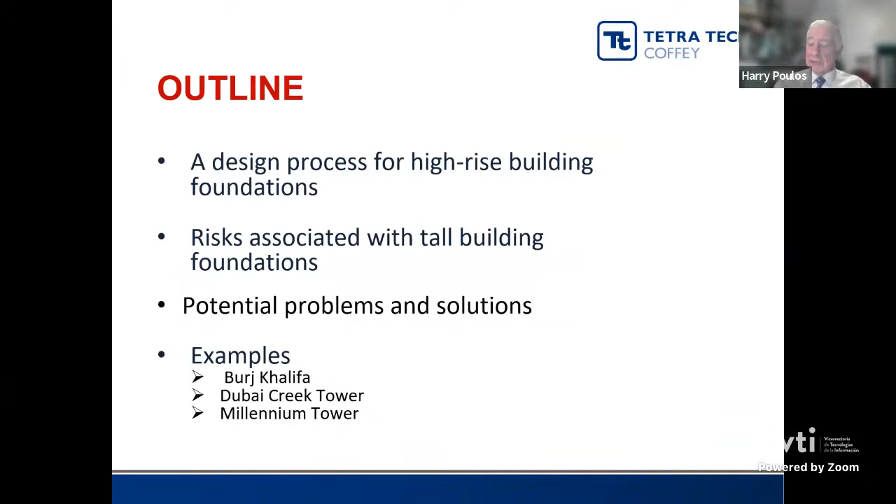And then I'll talk fairly briefly about 3 examples: the Burj Khalifa, the Dubai Creek Tower, both of these in Dubai, and then the Millennium Tower in San Francisco.

Now, the number of tall buildings - this graph is from the Council on Tall Buildings and Urban Habitat. What it shows on the vertical axis is the number of tall buildings that have been completed, and on the horizontal axis are the years. You'll see there's been an almost consistent increase in the number of tall buildings. These are buildings, I guess, in excess of 300 meters, so these would be super tall buildings.

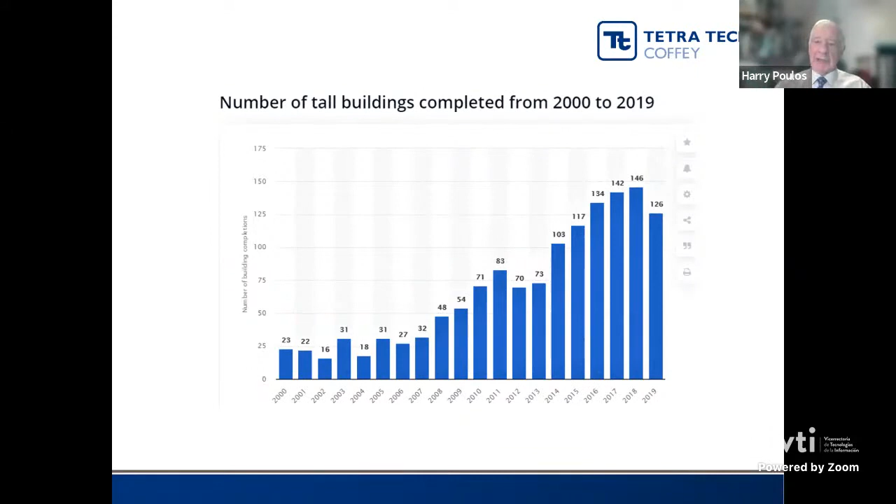There was a slight dip in 2019, but I think the number of tall buildings continues to increase significantly. Some aspects related to tall buildings are that we have high vertical loads, and they tend to increase non-linearly with height, because the taller the building, the more robust and heavy it has to be. We normally also have low-rise podium areas adjacent to the tall tower, so we have the potential for differential settlement between the tower and the low-rise area.

We have high lateral forces and moments, and those forces and moments are cyclic in nature. We also have to design for seismic forces due to earthquakes, which give rise to two types of forces: inertial forces, caused by the building moving backwards and forwards, and kinematic forces, induced in the foundation system because the ground is moving backwards and forwards and impacting on the foundation system. We also have to make sure we design for human comfort, so we design the dynamic response of the structure-foundation system so that you don't have excessive movement and vibration.

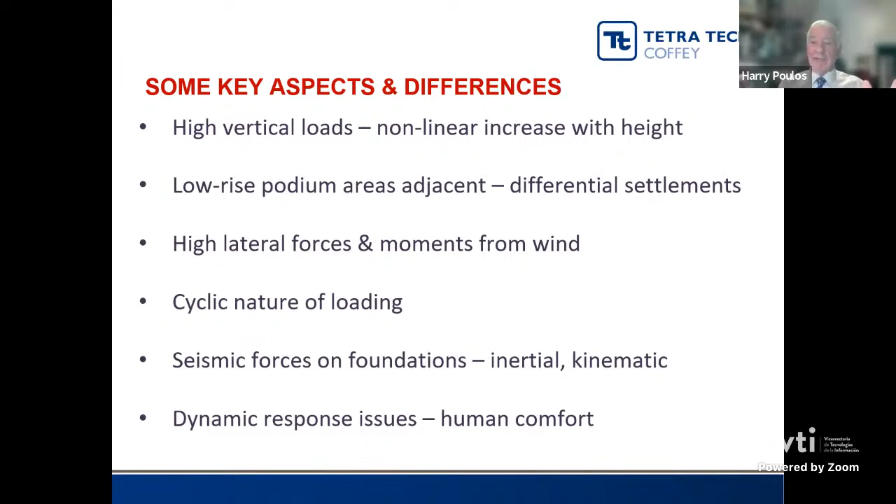Here are some interesting aspects that make tall buildings different. In recent times, there's been a tendency for taller towers to be located on smaller footprints, and we now have a number of buildings where the aspect ratio - the ratio of height to width - is in excess of 20, whereas normally it would be 8 to 10. This has given rise to big issues with respect to lateral and overturning stability of the foundation system.

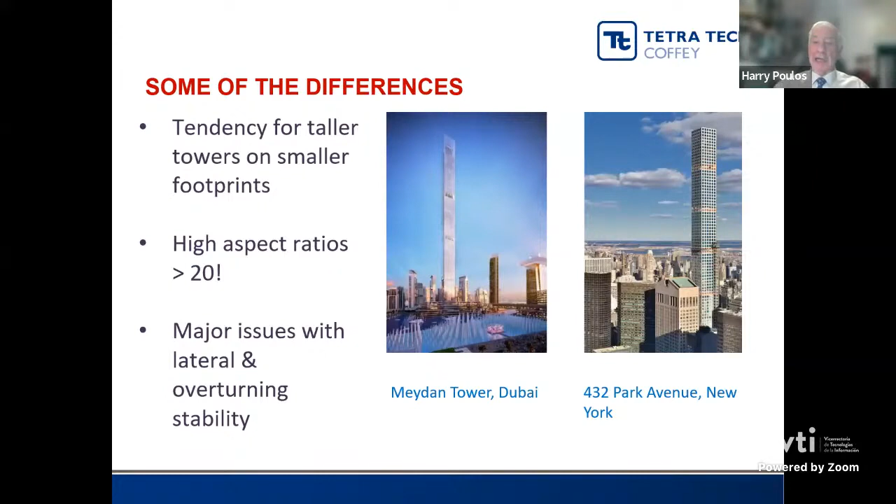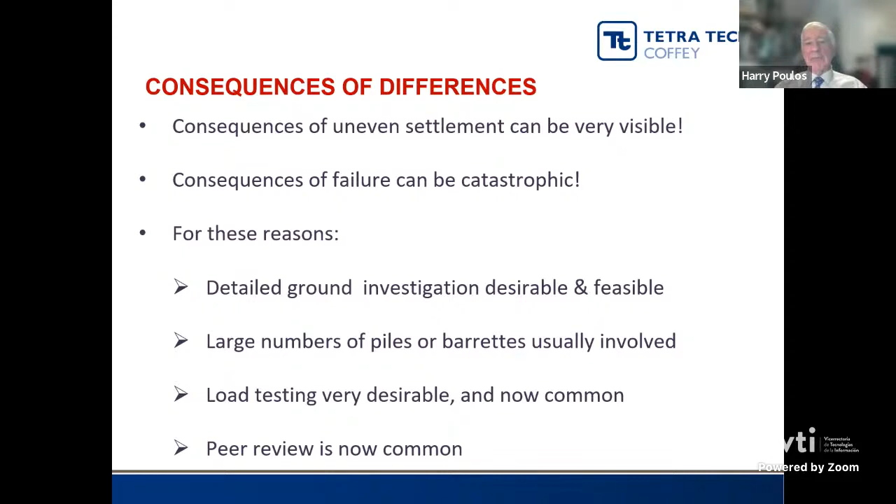So the consequences of these differences between tall buildings and other foundations are that even uneven settlements can be very visible, and the consequences of failure can be catastrophic. For these reasons and others, we need detailed ground investigations. Usually there are a large number of piles or barrettes involved. Load testing really needs to be done, and fortunately is now becoming quite common with major projects, and peer review is now much more common than it used to be.

Some of the ingredients for economic foundations are: firstly, we have to have the right concept for the structure and ground conditions. We have to have the right design criteria and methods of design, appropriate ground data and design parameters, quality construction, and appropriate pile or foundation element testing. Ideally, we also need to monitor the performance of the building during and after construction so we can satisfy ourselves that what has been constructed is in accordance with our design intent.

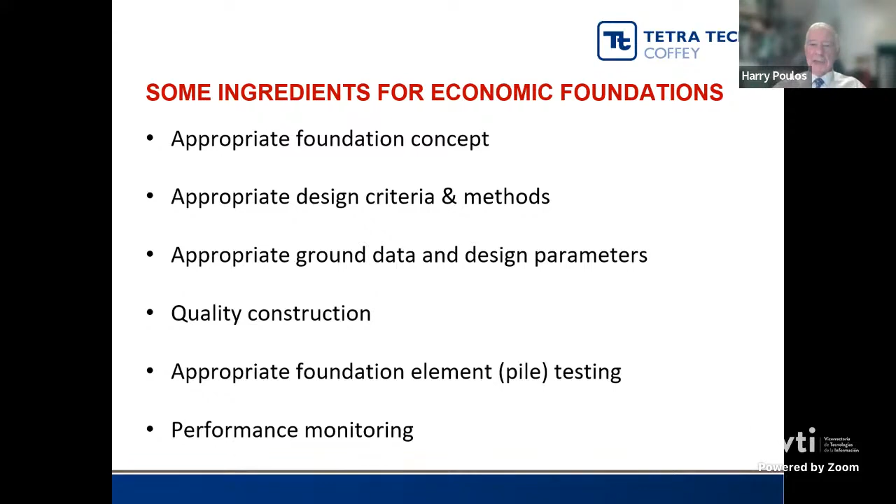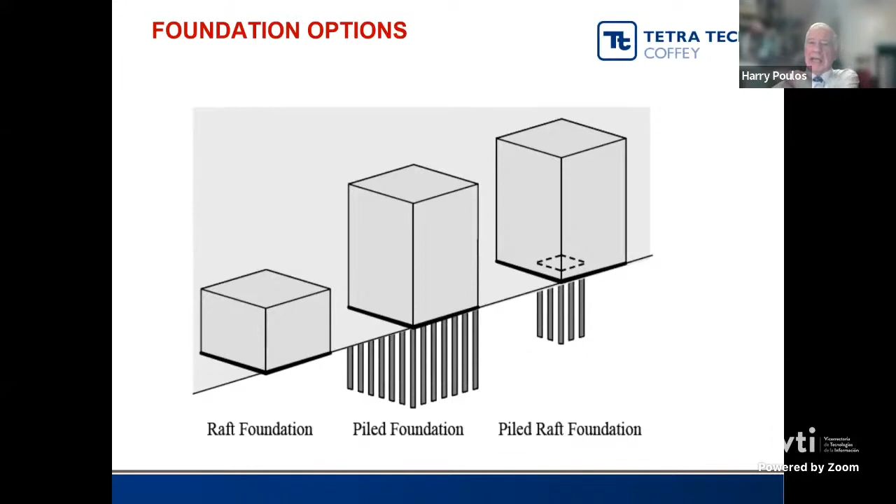Very quickly and simply, we normally have three types of foundations used for tall buildings: the raft or mat foundation, suitable for buildings on good quality rock and perhaps not too tall. Most tall buildings are on some form of pile foundation, either fully piled, where the piles take all the load, or, in more recent decades, the piled raft foundation, where it's recognized that the raft or basement slab can provide stiffness and resistance to the foundation system. This can enable us to reduce the number of piles and assist in the sustainability of the foundation system.

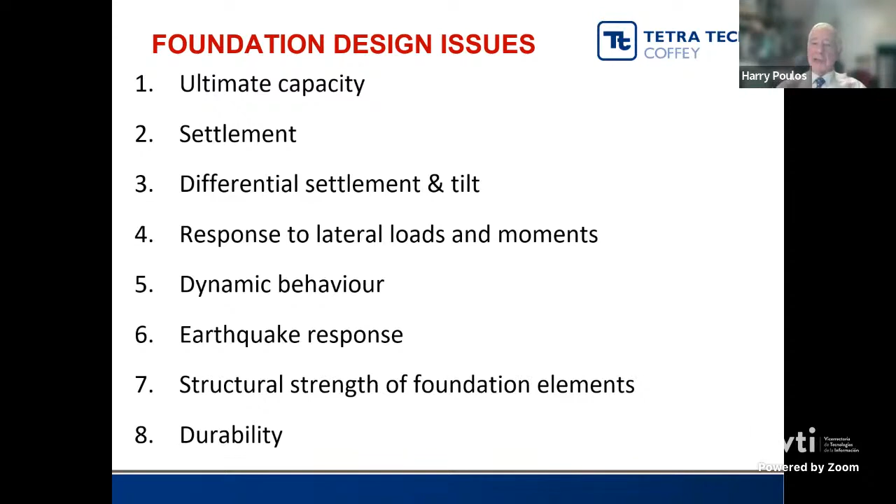So the foundation design criteria, the things we have to check for: ultimate capacity of the foundation system, the settlement and differential settlement and tilt of the building, the response to lateral loads and moments, the dynamic behavior and earthquake response. These are geotechnical issues, but we must also be aware that the foundation system has to be designed for adequate structural strength and durability. These days, it's not uncommon for specifications to require the foundation system to be durable for at least 100 years.

In the design process we adopt, we have three stages that we normally consider. The preliminary stage, the earliest stage, where we develop the foundation concept and decide the optimum type of foundation - whether a piled raft or a pile. Then we go into a detailed stage where we develop and optimize the design, and importantly, we interact closely with structural engineers. Then in the final stage, we do the final design, hopefully with the aid of load test data, so we can optimize and finalize our designs.

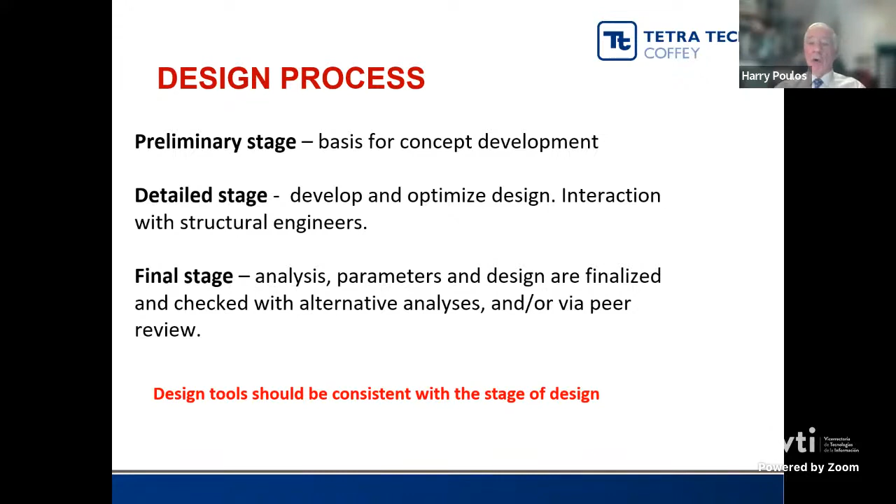We also incorporate peer review considerations into that final stage. Design tools should be consistent with the stage of design. It's not sensible in the preliminary stage to start using three-dimensional finite elements, because normally we don't have enough detail of the final foundation concept, nor all the geotechnical data required for detailed analysis. That normally comes in the final stage.

The analyses we do include ultimate limit state analyses, where we examine overall stability and geotechnical capacity. We also normally allow for cyclic loading analyses, because if there is a large amount of cyclic loading, there is potential for reduction of skin friction of the piles. We try to design the piles so that cyclic loading is no more than about 50% of the shaft friction capacity.

In terms of serviceability or allowable movements and settlements, typically we specify no more than 100 millimeters, although some buildings in Frankfurt, Germany have settled 150 millimeters or so without any damage. We try to limit the differential settlement or angular rotation to 1 in 500.

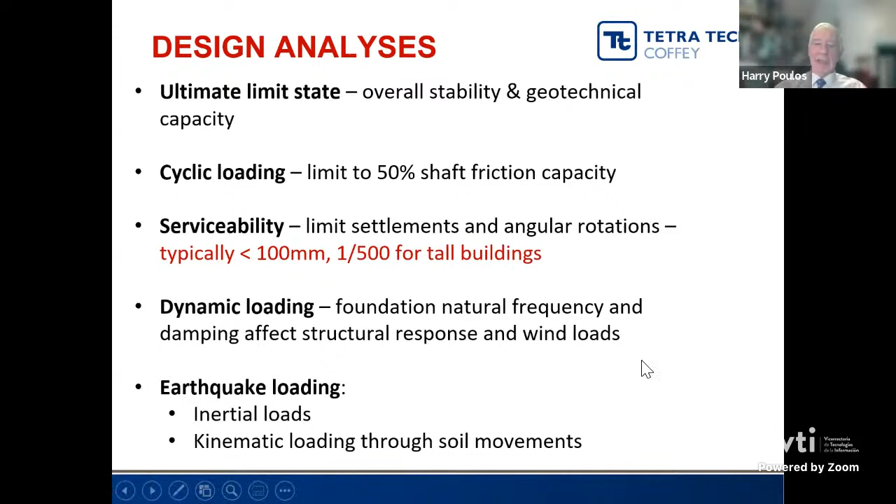We have dynamic loading where there are requirements for human comfort, so you have vibration and frequency requirements. As I mentioned before, with earthquake loading we need to take account of both the inertial loads due to the structure and kinematic loads through soil movements.

The main geotechnical parameters we need to assess in foundation design are the ultimate shaft friction and end bearing. If we've got a piled raft, we also need to know the ultimate bearing capacity of the raft.

We need to estimate the soil stiffness or modulus for vertical loading, bearing in mind that for long-term dead and live loading, the modulus is generally smaller than for short-term loading such as wind or seismic loading. It's important to distinguish between those two when looking at long-term settlements versus short-term movements due to wind loading. We need to estimate the ultimate lateral pressure so we can design the piles for lateral loading, and we also need soil stiffness or modulus values for lateral loading, since they will generally differ from those for vertical loading.

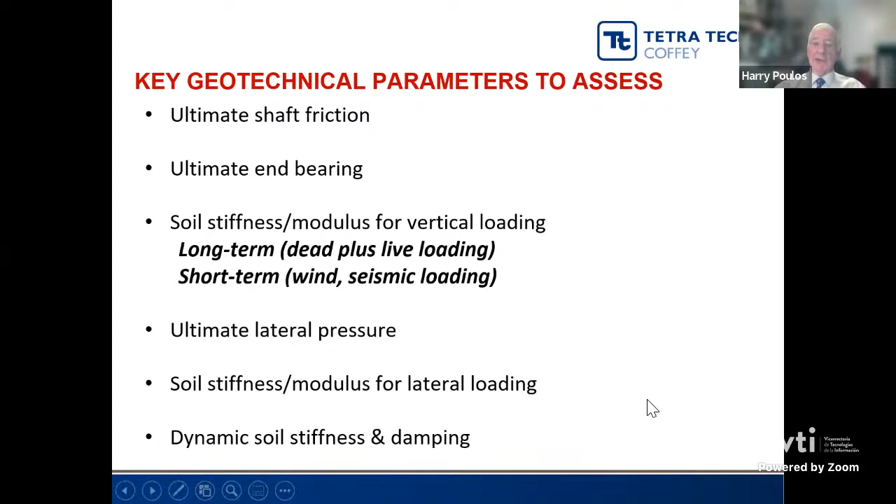We also need to estimate dynamic soil stiffness and damping of the soil in which the foundation is located. There are a number of soil structure interaction issues.

When we do stability calculations, we need to check first that the geotechnical resistance is adequate. We factor down our estimated geotechnical capacity so that the factored down geotechnical capacity exceeds or equals the factored up loadings. But we don't factor down geotechnical resistances when checking for structural loads in the foundation system, because that would artificially limit the amount of load that the piles can take.

We need to be aware that the stiffness of the superstructure will affect settlement and differential settlement. This is best taken into account in the structural analysis using values of the stiffness of the piles and the raft, which we provide to the structural engineer.

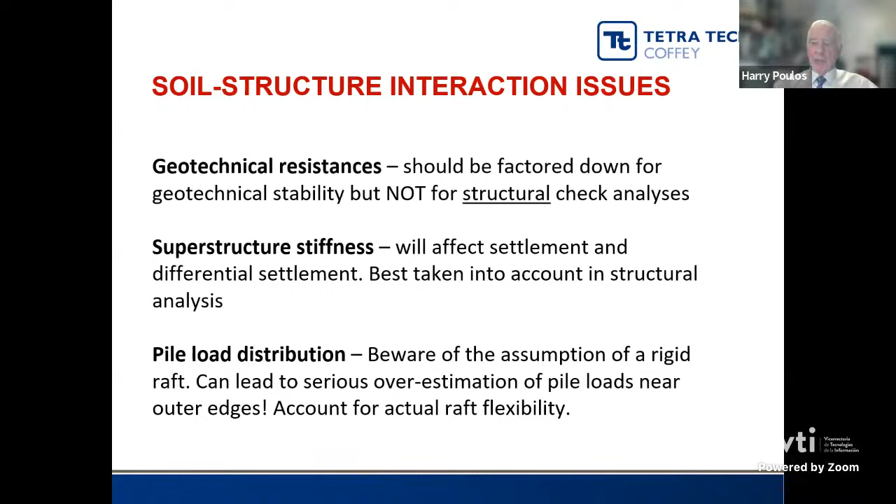Some commercially available software assumes you have a rigid raft. That isn't always a good assumption for tall buildings, particularly those 50 or 60 meters in extent, because even fairly thick rafts, as I'll show you later, can be relatively flexible over those sorts of distances.

It's important that we have cooperation between structural and geotechnical designers. That is essential for a successful outcome.

One of the key geotechnical outputs we provide to the structural engineer is values of pile stiffness, the axial, lateral, and rotational stiffness for each pile within the group. These stiffness values must take into account the interaction between piles in the group, which affects the stiffness as compared with a single isolated pile. Those values are then incorporated into the structural analysis to obtain structural design actions or loads.

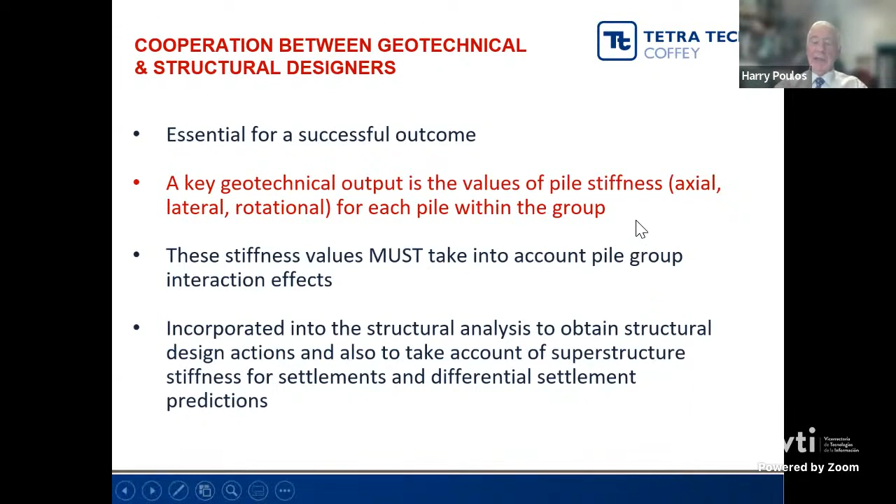And that takes into account the effects of superstructure stiffness and allows us to get a more accurate assessment of settlements and differential settlements. So that's the design process.

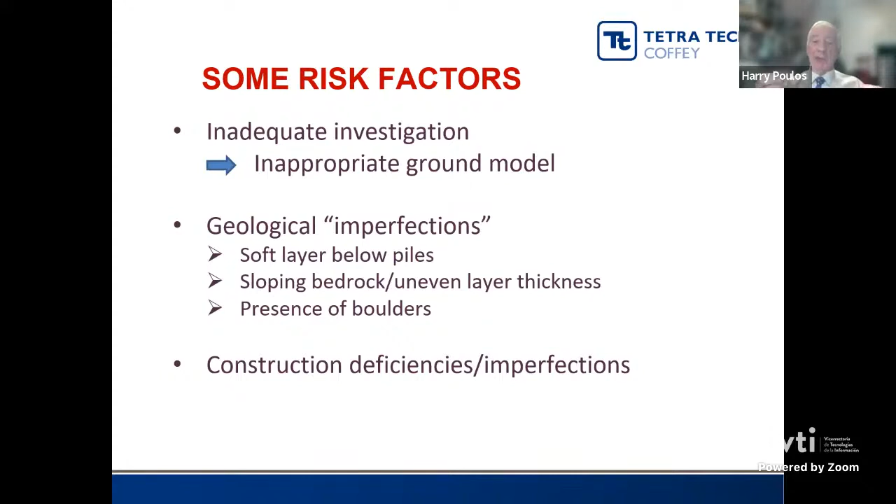Now, in reality, we have a number of risk factors in foundation design. It's possible, and has unfortunately been the case in many past projects, that we do inadequate investigation, and so we finish up with an inappropriate ground model. We also may have to contend with the reality that geology provides imperfections—non-ideal conditions. For example, we may have a softer layer below the tips of the piles, sloping bedrock or uneven thickness of layers, or boulders. And in terms of the construction process itself, there may be problems or deficiencies.

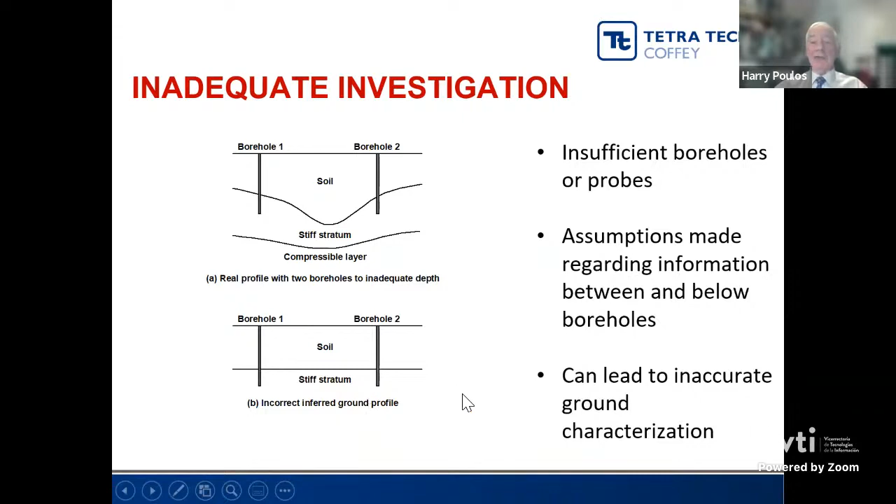Just briefly to illustrate some of these risk factors, here's a hypothetical situation where we put down two boreholes and we think they show a horizontal soil layer with a stiff stratum underneath. But what we miss here are two important factors. One is that there may have been an old riverbed in between, and if our boreholes don't go deep enough, we miss the fact that there is a compressible stratum below that stiff stratum. That can lead to a simplified and incorrect ground profile, which can in turn lead to problems with our foundation, which we'll talk about towards the end of the lecture.

And here are some of the geological imperfections. This first one shows a case where there are compressible clay seams in the rock into which the piles are founded. This diagram, top right, shows strata of varying thickness or sloping bedrock.

What happens there is that because the piles are of unequal length, there is a tendency for the foundation to rotate a little. The next one, bottom left, shows a situation where you have a compressible stratum under the founding stratum, and that may not be detected when you do pile load tests, because with a single pile, that compressible stratum may not influence the results very much.

But for a wide pile group, that compressible stratum can be very influential. And finally, in this particular case, you may have boulders in the ground. This would be particularly where you've got glacial deposits, and you may install a pile which you think is on rock, but that may be just a boulder, so the pile itself is not really on rock, but on a boulder which acts like an enlarged base.

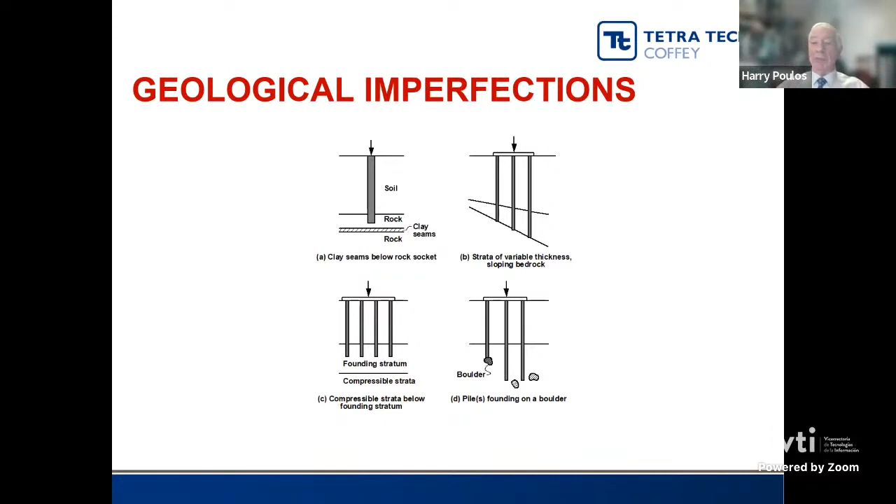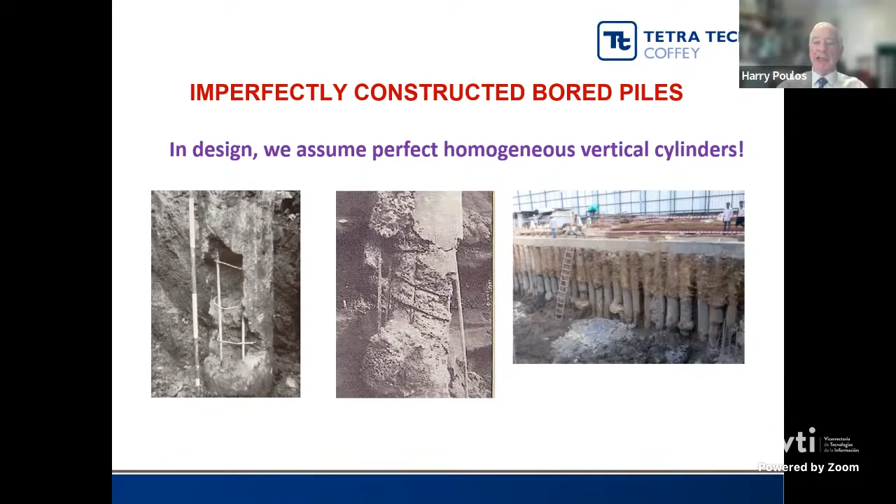And of course, we can have imperfect construction. Here are some unfortunate examples of bored piles, which are very imperfect, as you can see, and here are piles that are not very attractive because they're not what we assume in design—in design, we assume that the piles are perfect homogeneous vertical cylinders. In reality, that is certainly not the case here.

So what are the consequences of those imperfections? In terms of design issues, if we've got a situation with uneven settlements, we need to try to correct them to reduce differential settlements. We have two classes of methods, hard and soft, which I'll describe in a minute. We then need to design remedial or enhancement works so that we increase the resistance of the foundation system, and we need to be aware of the load sharing between old and new elements.

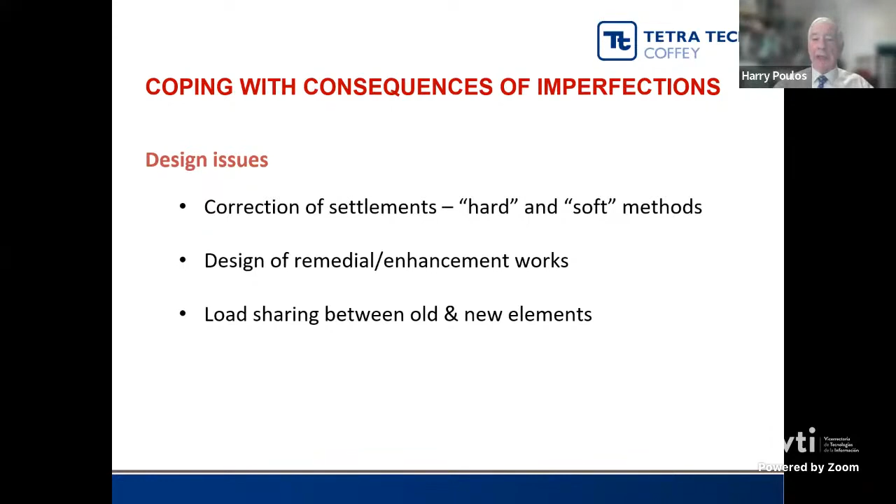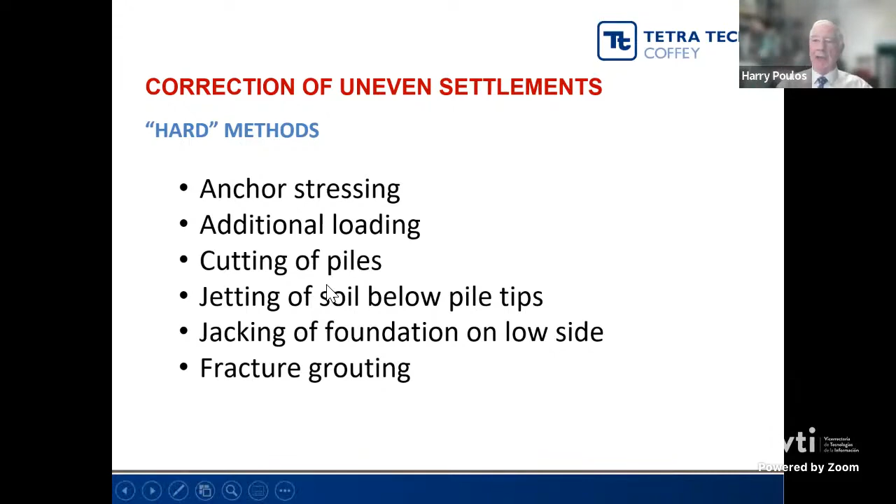Now, I mentioned methods of correcting uneven settlements. Here we have some of the hard methods—these actually put force on the foundation system or building to try to correct the uneven settlement. We can use anchor stressing or additional loading on the high side to try to get the high side to settle more. We can try cutting the piles, but that generally isn't very effective, and it's a bit of a terrible process. We can try jetting the soil below the pile tips, or jacking the foundation on the low side to jack it up, but that isn't always effective, because as you jack up, due to Newton's law, there's also a force that goes down, so that may not be effective. Another method used is fracture grouting to try to jack up the low side, but that is also not a very controlled process.

We have then what I call the soft methods, which basically involve doing something to the soil rather than to the structure. So we have the possibility of doing soil extraction—we remove some of the soil from the high side to try to induce extra settlement and so reduce the differential settlement.

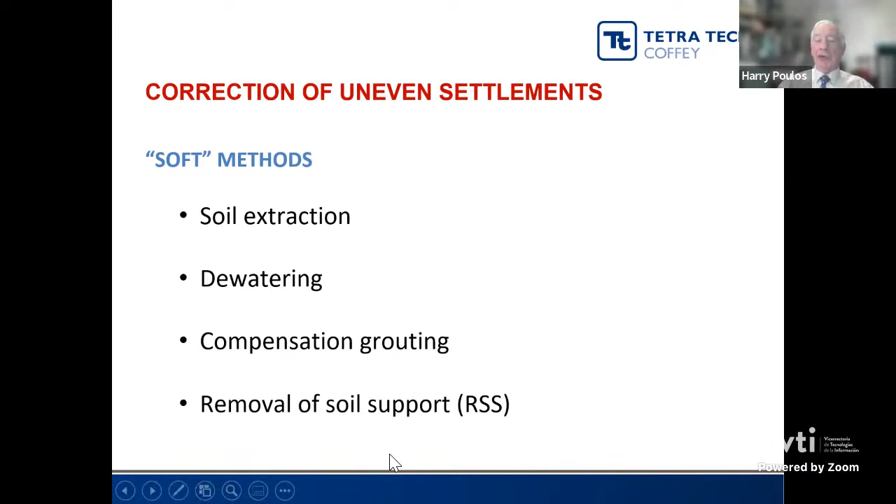We can, in principle, try dewatering, although that's not always a good idea. We can try compensation grouting so that we lift the soil on the low side, and we can then also try what I call removal of soil support.

These two diagrams show where soil extraction has been used, in at least two cases, and there have been many more. Here in Iran, there was a grain elevator terminal that had settled unevenly. So they constructed a trench and put in horizontal saws to remove soil from the high side increasingly, doing a series of saw cuts to induce the high side to settle more and reduce the uneven settlement.

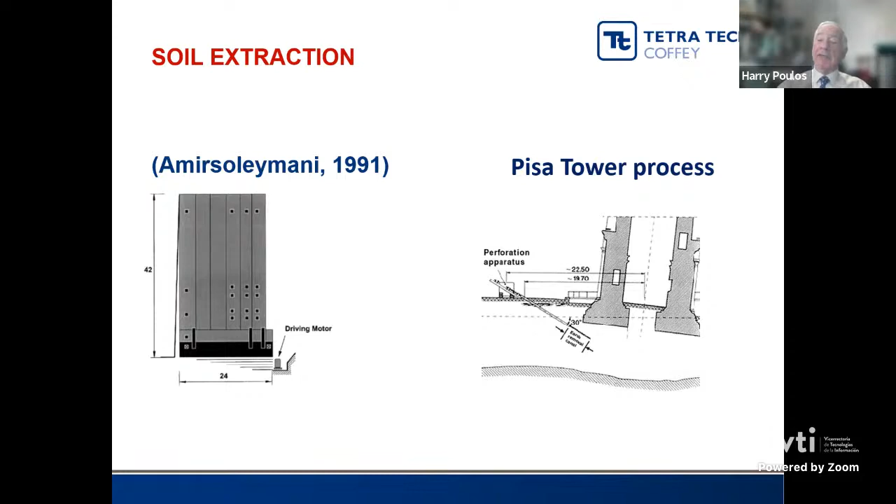And this one on the right, the very famous Pisa Tower process, where a series of inclined auger boreholes was introduced under the high side of the tower, and soil was augered out. I think there were 43 boreholes in all, and that corrected the lean of the tower by about 0.5 degree. Professor Burland, who was involved in that project, has estimated that it will increase the life of the building by some 300 years.

And I mentioned the removal of soil support approach. This is a method that has been used in China, and we almost used it in Hong Kong for a tall building. It involves drilling a series of boreholes outside the footprint to try to remove the soil support and cause some additional settlement on the high side of the building, to reduce the tilt.

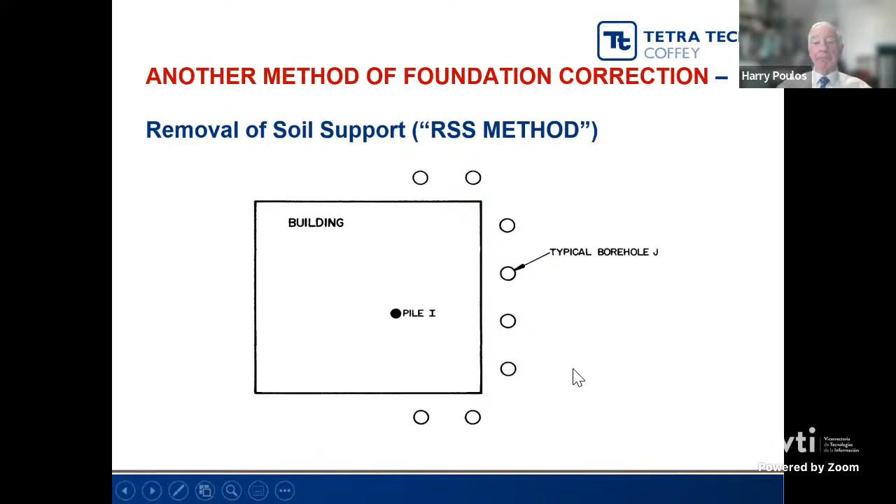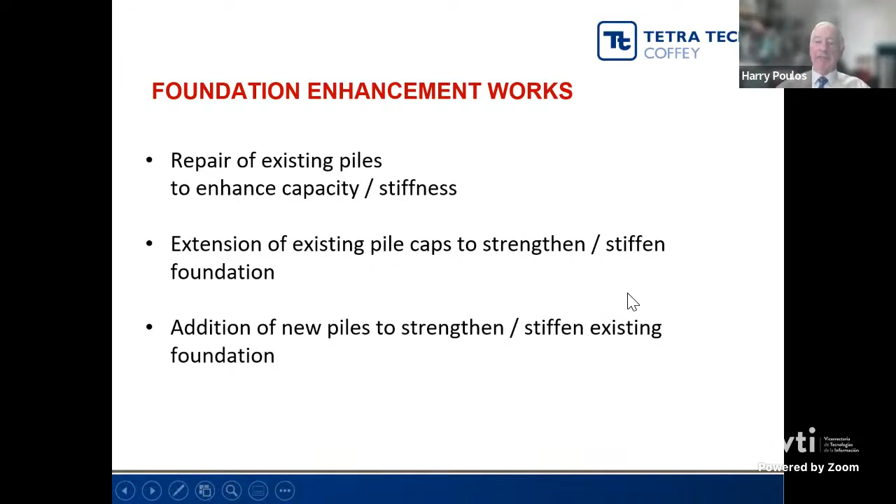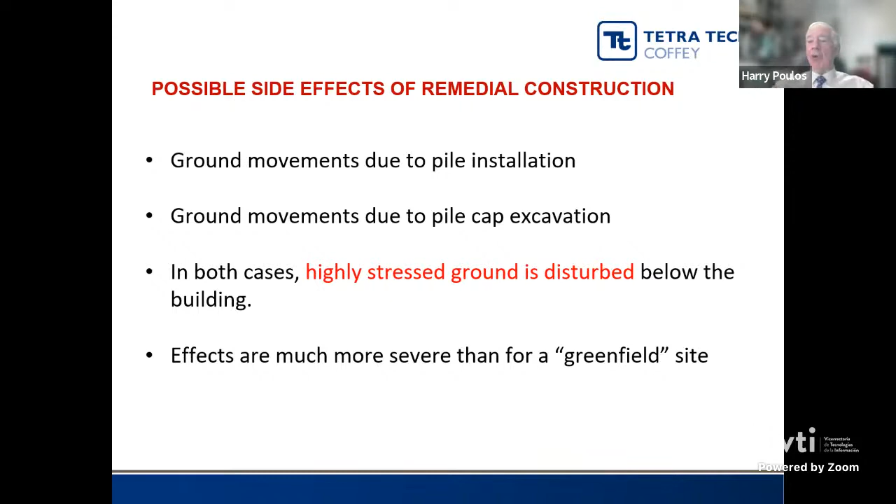We have to be very careful that when we do remedial work, we don't make the problem worse. Because when you're installing piles, you cause ground movements inevitably, and those can affect the existing foundation system. That will also happen if you do excavation for the pile cap itself. In both cases, you're disturbing the ground under the high-rise building, which is now highly stressed, so the ground movements due to your construction operations are much more severe than they would be on a green field, or level site, with no building.

What are the measures that we can take to reduce risks? Well, I think certainly the first thing we can do is have an independent peer review of the ground investigation report, and then an independent peer review of the foundation design.

Independent supervision of foundation construction, to try and avoid problems of construction imperfections. We need to be able to do foundation testing of the piles or barrettes. We need to monitor the settlements during construction and compare what we measure with what we predict, because if there is a problem, the sooner we can detect it, the sooner we can start to fix it.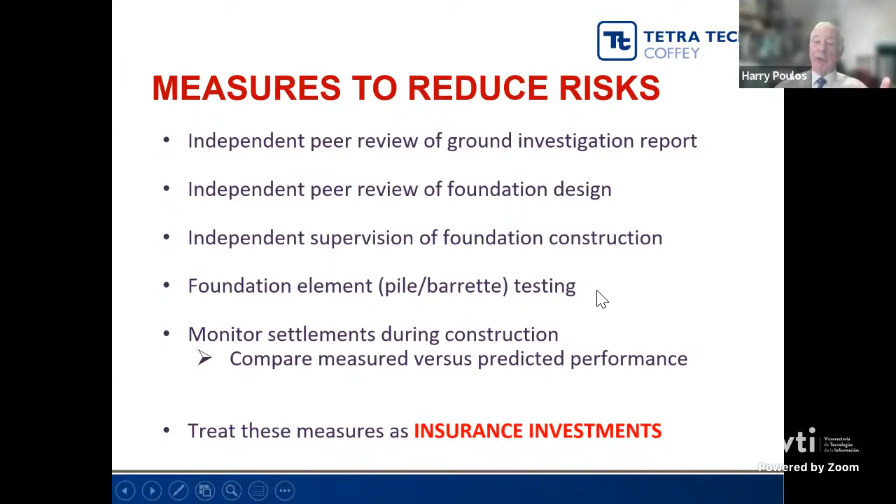We should treat these measures - they all involve money, of course - as investments in insurance rather than as costs. Because in the end, if you don't take these measures, the possible cost of fixing the problem can be very great.

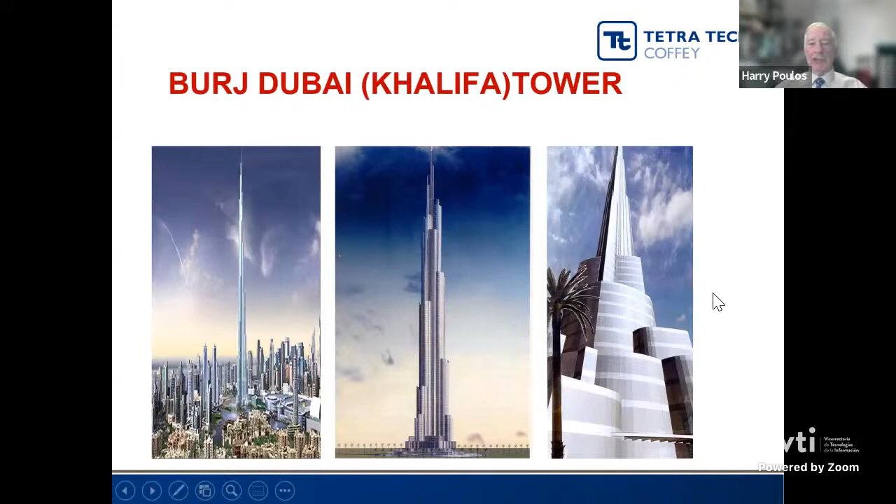So let me talk about the three case histories now that I have had some involvement with. The Burj Dubai, as it was originally called, or the Burj Khalifa in Dubai. These are the original architect's concepts, the drawings for them, and it was to be, and is still, the tallest building in the world. These are the challenges then, of the world's tallest building.

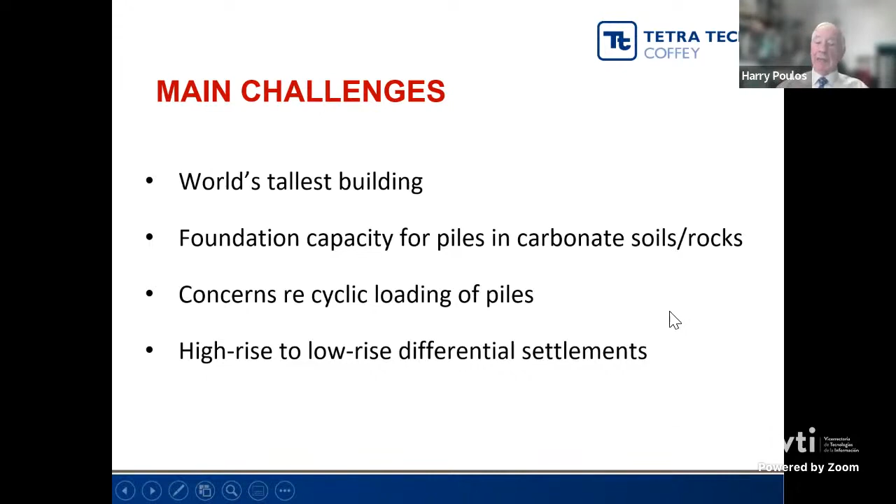The site characterization was fairly significant. There were 30 boreholes, and SPTs were done on the upper strata. Pressure meter tests were done in 5 boreholes, and a lot of piezometers were put in. Importantly, geophysics was done using cross-hole tomography.

The geophysics had two purposes. One was to give us profiles of shear wave velocity with depth so we could get other estimates of the stiffness of the ground. It was also a way of estimating and assessing the uniformity of ground conditions, because even with 30 boreholes there could be geological features we miss, and geophysics can identify those sorts of geological problems if they exist.

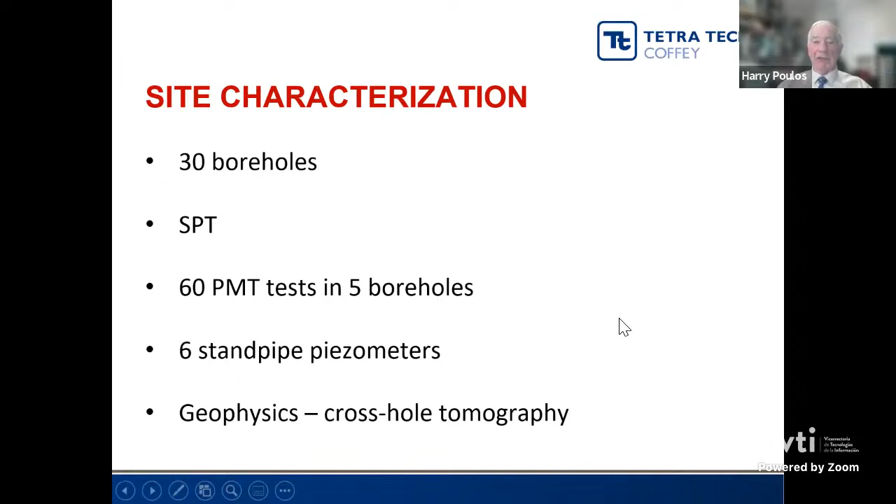Fortunately, in this particular case, the ground conditions were very uniform, and this is a simplified profile. We had some silty sand near the surface, and then a series of layers of cemented calcareous sands and rocks - essentially soft rocks with typical unconfined compressive strengths varying from maybe 1 to 3 megapascals. This shows the base of the tower, the raft, and the base of the piles.

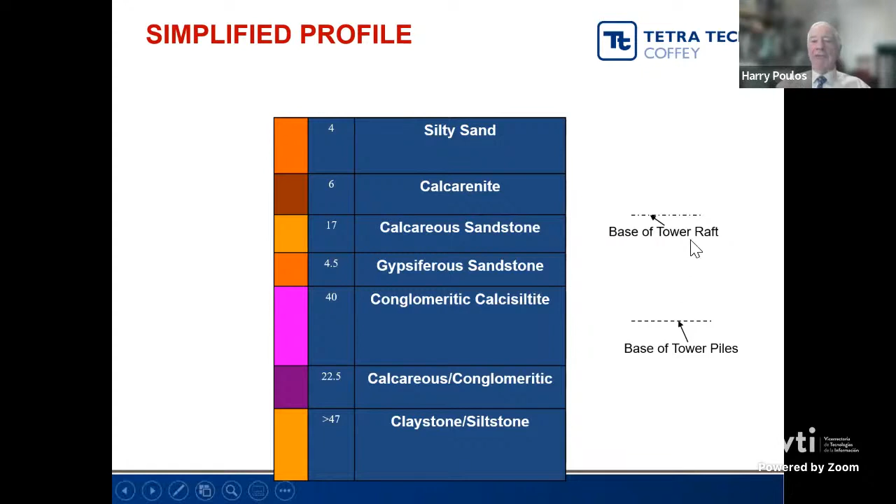In fact, the piles were not very long - they turned out to be 47.5 meters long. If you draw this to scale, the building itself is 828 meters, so you'll see that the foundation is about 5% of the height of the building.

The initial pile design - and I should say that we and Hyder worked very much in parallel rather than in series. We worked very closely at all stages. We were involved in the ground investigations, in assessing the ground model, and in doing the design. It wasn't a process where Hyder did their design and then passed it on to us - we did this jointly, and it was a very cooperative and satisfactory process.

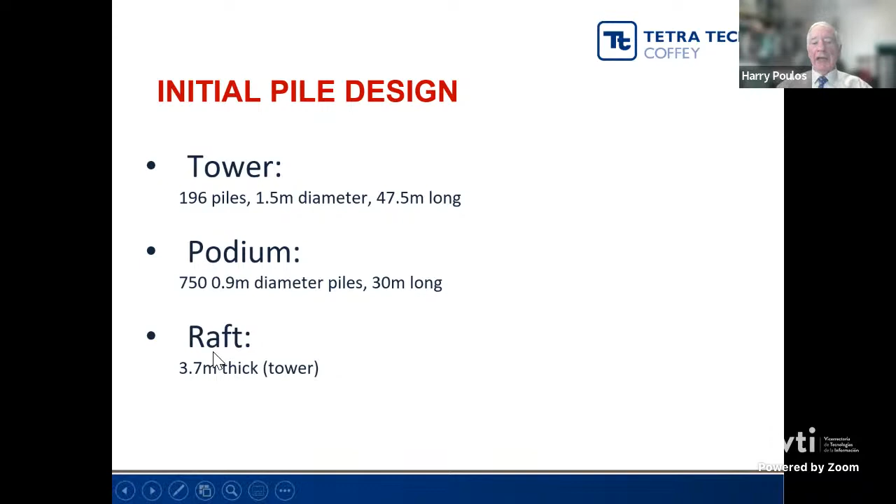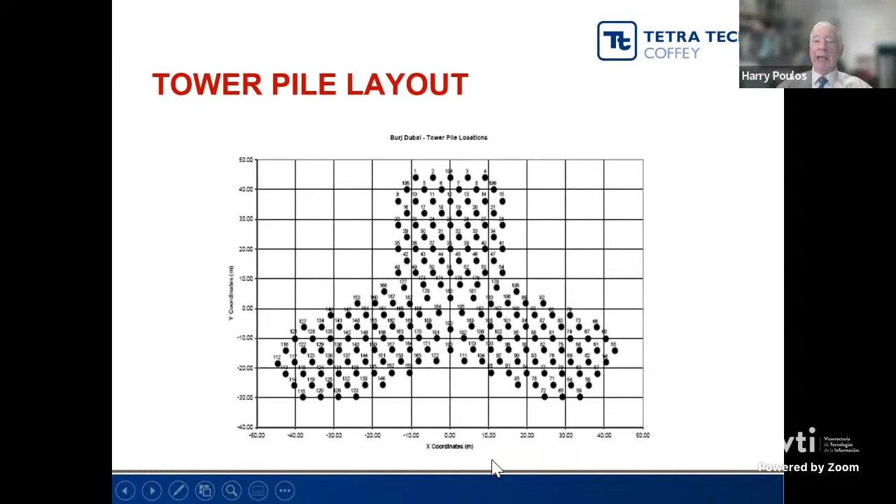The original design involved 196 piles, 1.5 meters diameter, 47.5 meters long. The podium, the outside low-rise area, was on 750 smaller diameter piles, 0.9 meters, 30 meters long. The raft itself under the tower was 3.7 meters thick. Here is the layout - there are basically 3 wings, so it's a very symmetrical layout of the foundation system.

Hyder and ourselves did independent calculations by various methods to estimate the settlement. It turned out the geotechnical capacity of the foundation system was not a problem - the controlling design element was the settlement and differential settlement. Hyder used a program called Repute and also a finite element program called Abaqus, and got somewhere between 66 and 72 millimeters.

We at Coffey used 2 methods: FLAC, the finite difference program, got 73 millimeters, and we used one of our in-house programs called PIGS, Pile Group Settlement, and got a very similar result. Then subsequently, we did a very simple calculation using an equivalent pier for the foundation and got an almost identical result. So you can see that different methods by different designers got very similar results, somewhere between 65 and 75 millimeters for the estimated maximum settlement.

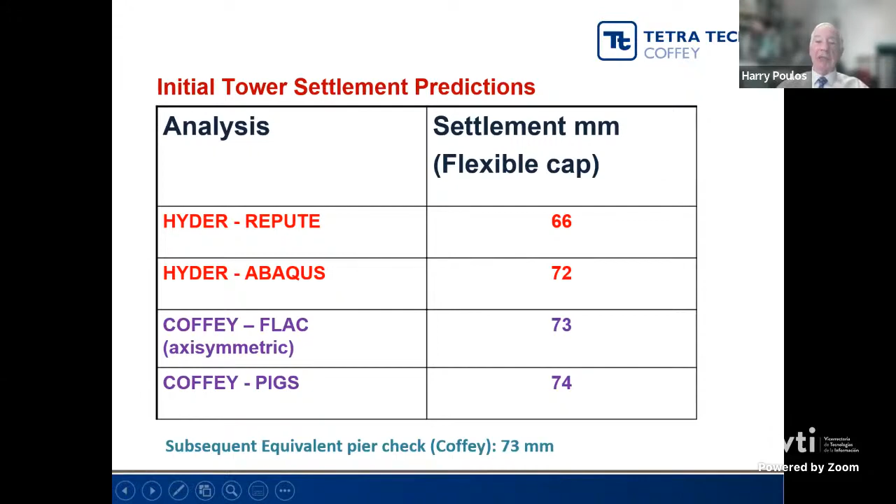That was within the design specifications. Now, of course, it's essential in a project like this to do load testing to verify the design assumptions. There was a load test program which involved 3 static compression tests done on 1.5 meter diameter piles with toe levels at 35, 45, and 55 meters long, just to see whether we could economize on the 47.5 meters we had originally designed.

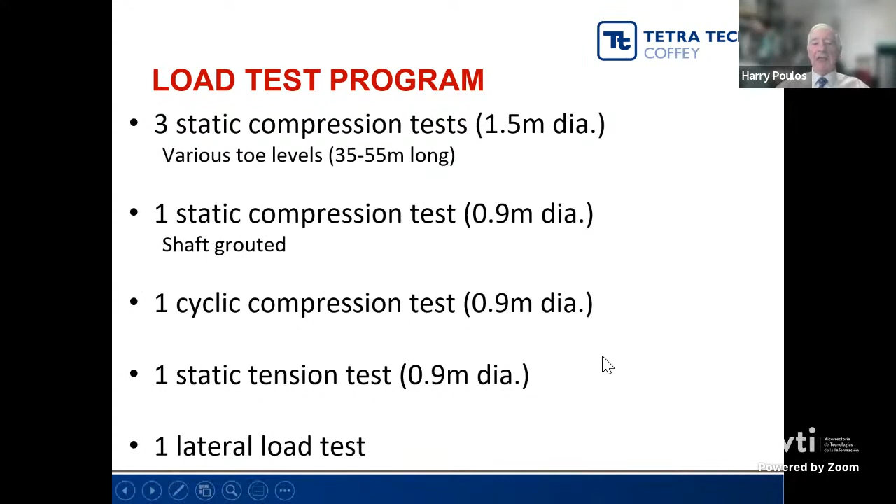We did 1 static compression test where we shaft grouted the piles to see whether that would increase the shaft friction. We did a cyclic compression test on a smaller pile to check performance under cyclic loading. We did a static tension test for the smaller piles, and we also did a lateral load test.

The outcomes of this load test program were very favorable. We found that the 1.5 meter piles were loaded to twice working load, the smaller piles to 3.5 times working load, and none of those piles appeared to be approaching failure, so they had more than adequate capacity.

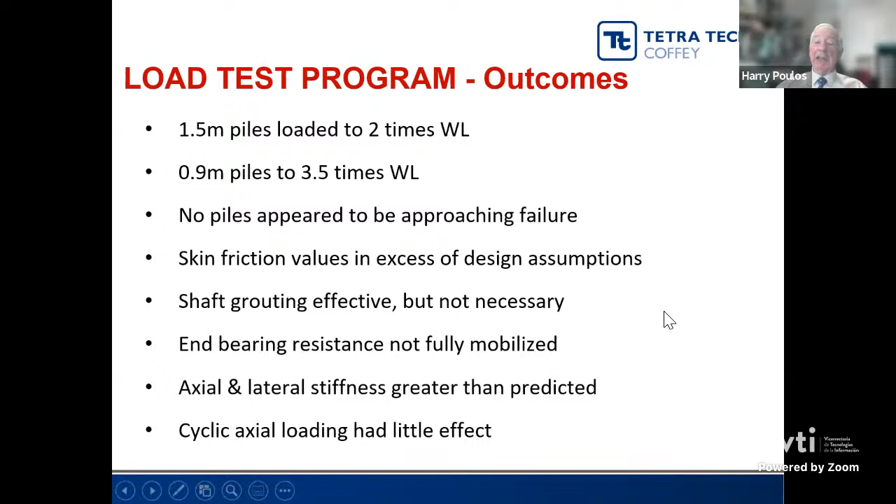The skin friction values were actually in excess of our design assumptions, so that was good. The shaft grouting was found to be effective, but not necessary, because we had adequate skin friction without it. The end bearing resistance wasn't fully mobilized because we couldn't get enough load into the piles to generate the full end bearing. The axial and lateral stiffness values were greater than predicted, and fortunately the cyclic axial loading had little effect. So all of that was very positive.

During construction, settlement readings were taken at the foundation base level, and these are the measured settlement contours when the building was at about 80% of its final height. The good news is that the settlements were very symmetrical, with the maximum settlement in the center and minimum settlements on the outside.

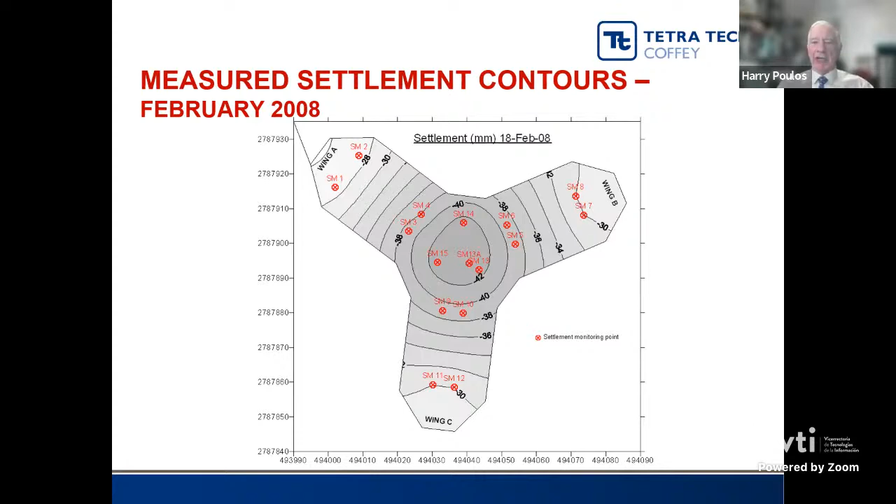There were significant differential settlements between the center and the outside, maybe of the order of 10 to 12 millimeters, even though this raft was 3.7 meters thick, quite a thick raft. But because the building itself is about 55 meters in lateral extent, you still get bending of the foundation raft.

Here are time settlement records, with the horizontal axis showing the distance along one of the cross sections, and the settlement at various times. The upper diagrams show the measured settlements at different times during construction, and this last one was at about 80% of the dead load, which was about 43 millimeter settlement.

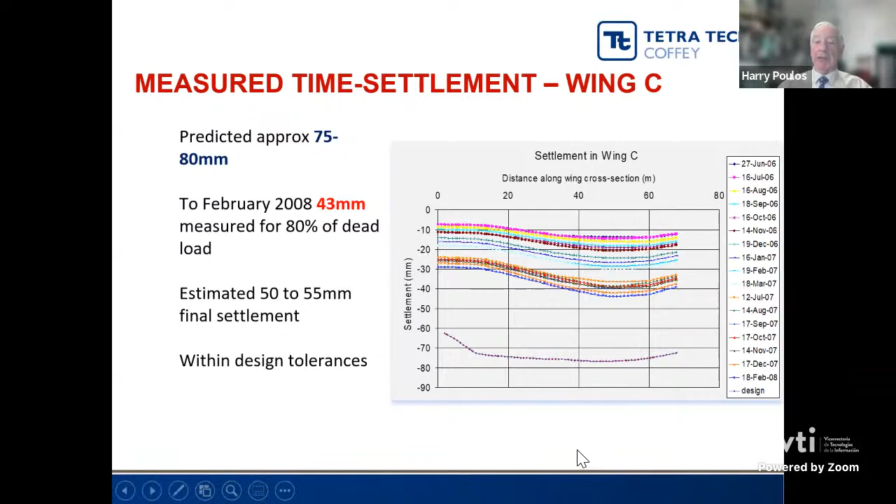This is our design estimated final profile, which showed about 75 millimeters maximum. We estimated on that basis that the final settlement would be of the order of 50 to 55 millimeters long-term, which was reasonably comfortable and certainly within design tolerances. So we were a little conservative in our assessment of settlement, but quite comfortably so.

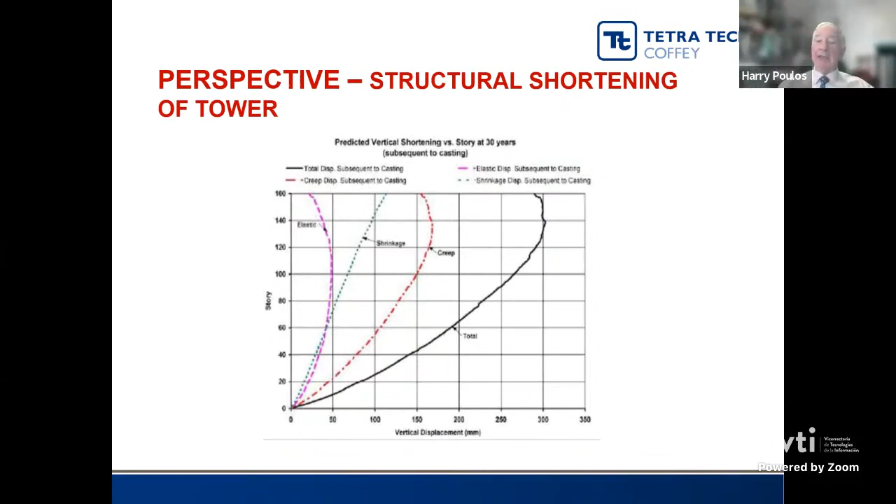Just to give you some perspective, the structural designers estimated how much the building would shorten because of elastic shortening, also shrinkage and creep of the concrete. What they estimated was that the top of the building could shrink by as much as 300 millimeters. So our settlement of the order of 50 millimeters is actually significantly less than the structural shortening of the building.

So here are three pictures of the building as it's being constructed: early in 2006 when it's up around 10 or 15 floors, early 2007 when it's getting towards the top, and the grand opening where it was renamed the Burj Khalifa from the Burj Dubai, which happened very early in 2010.

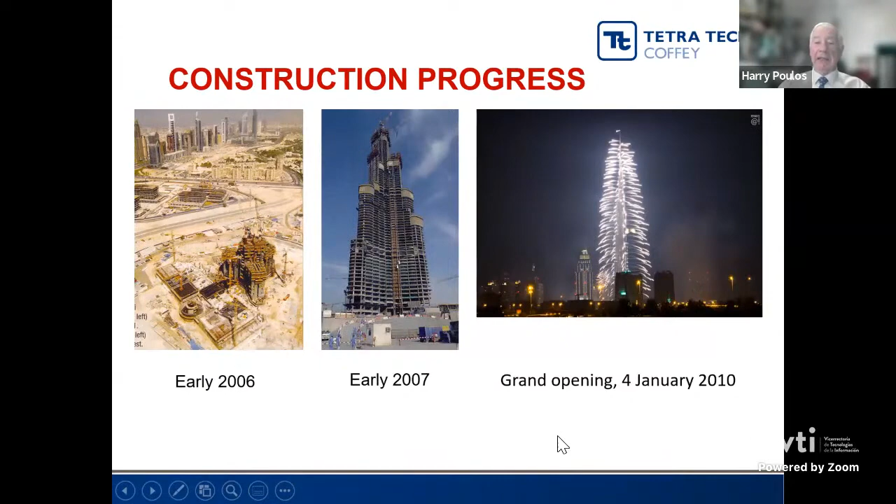The next project I'll mention very briefly is also in Dubai, and this is the Dubai Creek Tower. It's a very new development, about 8 or 10 kilometers inland from the Burj Khalifa, in what is really a big desert area. The concept here is that there will be a whole series of high-rise towers with the centerpiece, the Dubai Creek Tower, being in excess of 1,000 meters. It will not be a residential tower, but an observation tower and tourist attraction.

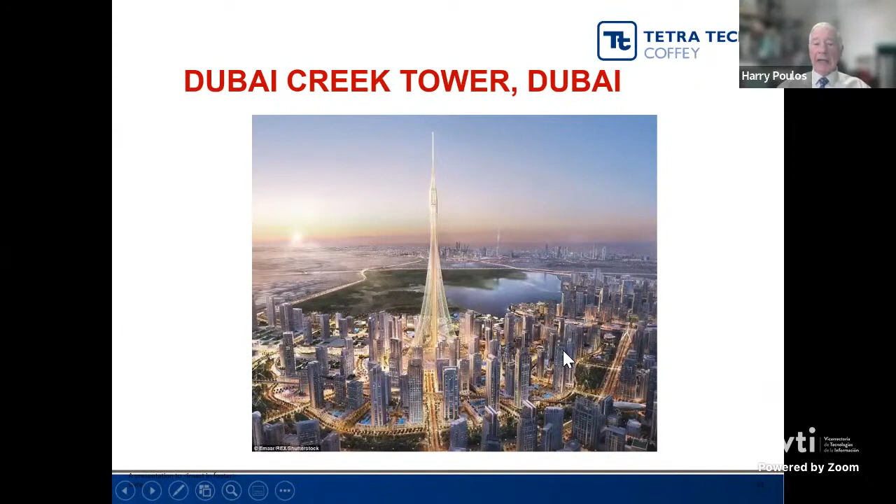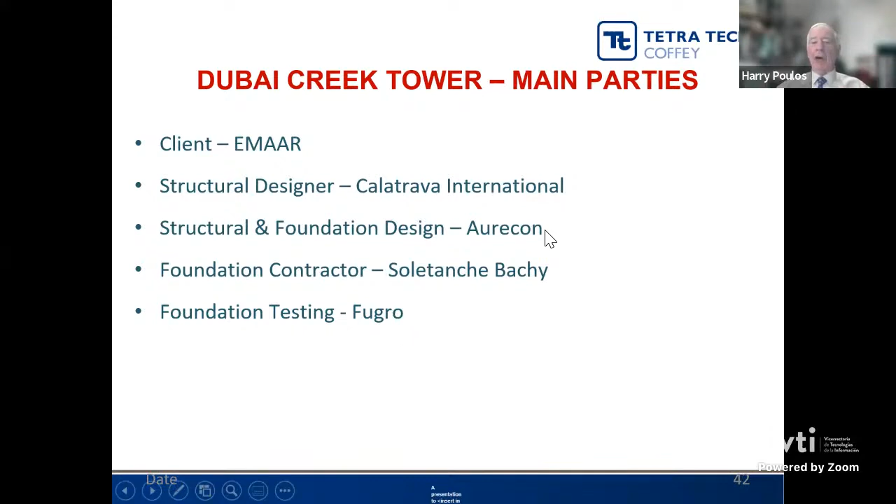The people involved here were EMAAR, who was the client. The structural designer was Calatrava International. The foundation design was done by Aurecon in South Africa. The foundation contractor was Soletanche Bachy. The testing of foundations was Fugro, and I was assisting Aurecon with the foundation design.

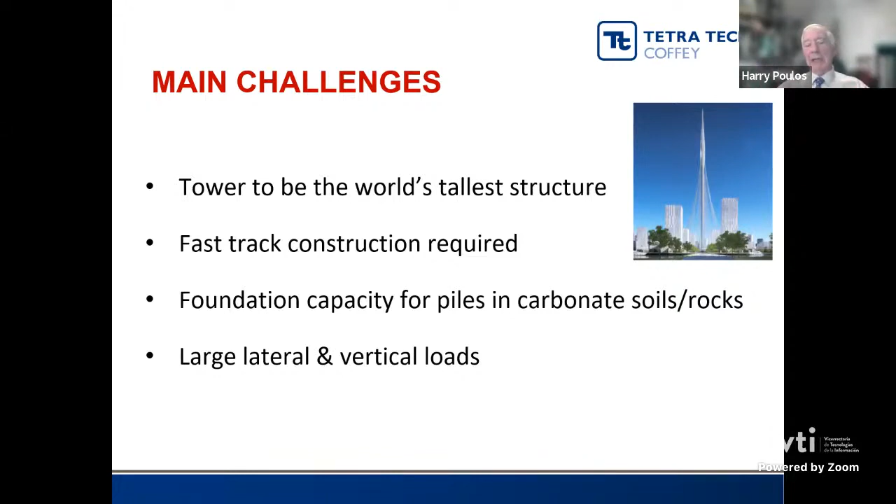The main challenges here: we were now dealing with what will be one of the world's next tallest structures. Fast track construction was required. Again, we had carbonate soils and rocks, so there were capacity issues, but we also had extremely large lateral and vertical loads on this structure.

The challenges were met here by intensive ground investigation. A lot of boreholes were done here, more than the Burj Khalifa, because this was somewhat more extensive in area. High quality in situ and laboratory testing was carried out, along with high-level design analyses by Aurecon, the designers. There were a series of design workshops, and also a major load testing program.

The foundation system itself consisted not of piles, but of barrettes. These are basically rectangular piles, 1.2 meters by, I think, either 2.8 or in some cases 6.2 meters wide. So very large rectangular piles.

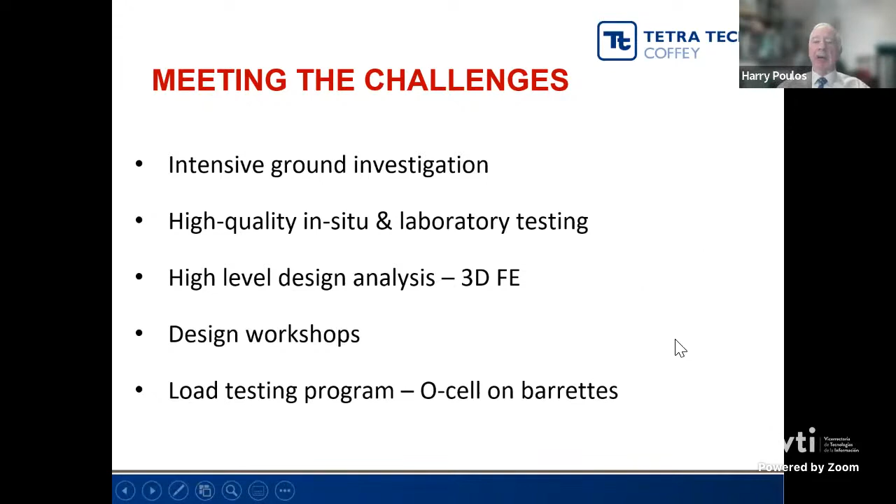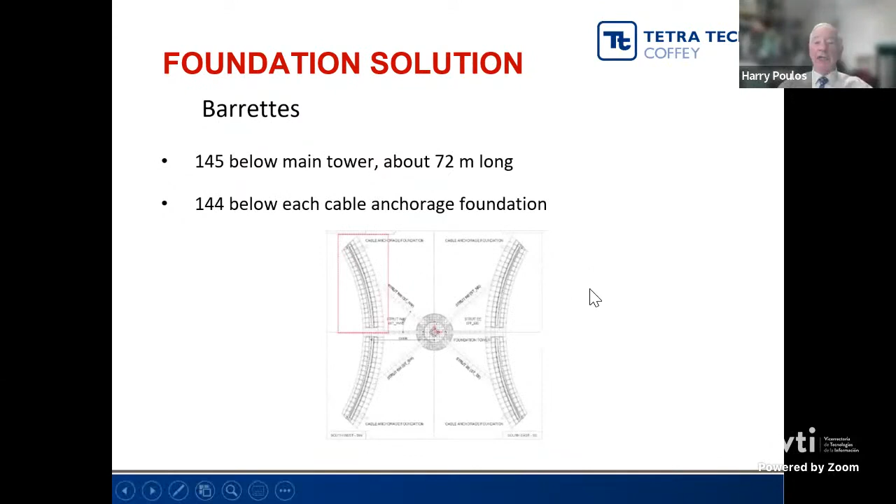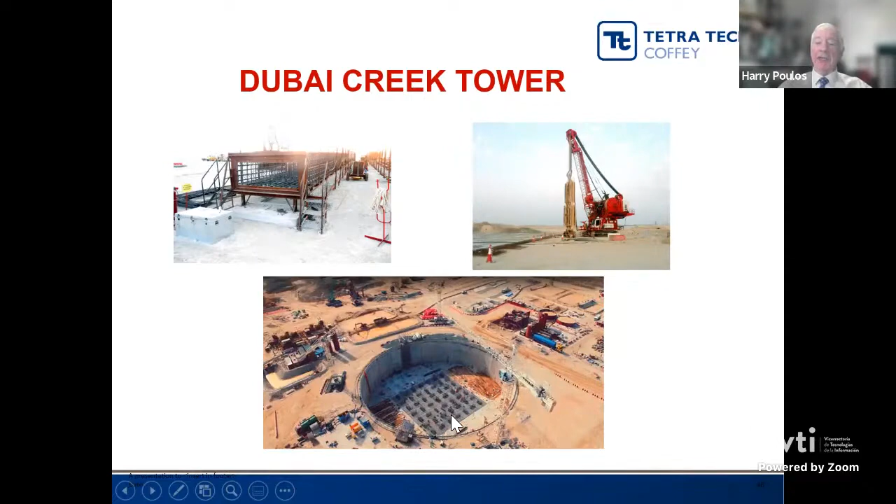This is an aerial picture of the foundation construction. There was a wall constructed around the tower area, some 10 meters deep, a diaphragm wall, and within that there were barrettes installed for the foundation system.

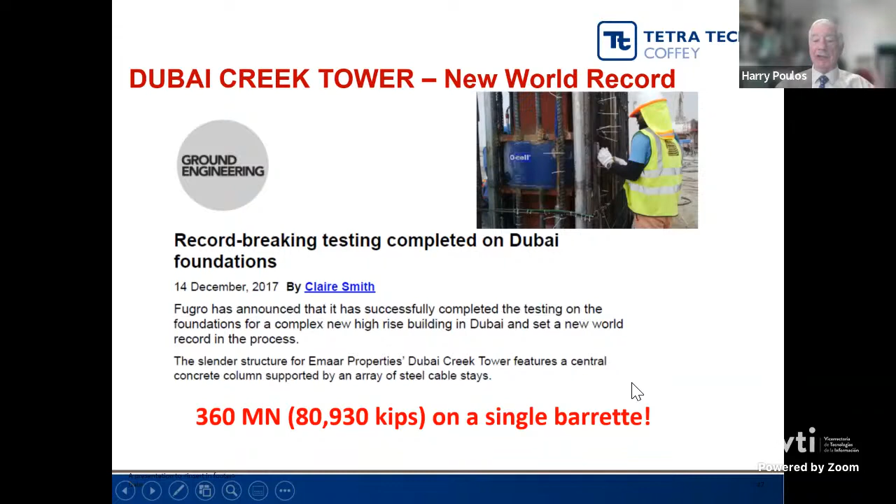One of the interesting things was that with the load testing carried out on the barrettes, a new world record was set for the load applied to a single barrette: 360 meganewtons, nearly 36,000 tons on a single unit. That is an enormous load.

Unfortunately, that project has stalled. It has started but hasn't really been completed for various financial and other reasons, and I guess the COVID epidemic also contributed to that delay. But if and when it is completed, it will be, I believe, in excess of 1,300 meters. So it will really be quite a landmark tower.

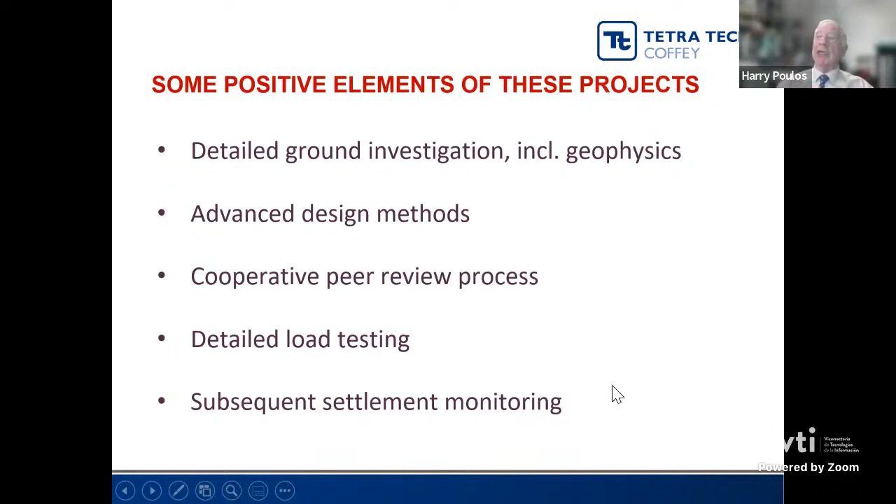Those two projects have a number of positive elements: detailed ground investigation including geophysics, advanced design methods, a cooperative peer review process, detailed load testing, and certainly in the case of the Burj Khalifa, subsequent settlement monitoring, which will also be the case with the Dubai Creek Tower. Now let me conclude with a less favorable story.

This is the Millennium Tower in San Francisco. My involvement with this was very peripheral. I was not involved in the design, but I was asked some questions by legal and media outlets about it, so I know a little bit, but not a great deal. This tower is 184 meters tall and 58 stories high. It's the tallest residential tower in San Francisco, and it is home to many very wealthy and influential people.

It was founded on 945 reinforced concrete piles that were not founded on rock, as many tall buildings in San Francisco are, but on a dense sand layer, and the piles were only about 24 meters long. Underneath the sand supporting those piles was quite a thick layer of clay.

Over the period of existence of this building, about 10 years, there were a lot of construction activities involving excavation and dewatering. The maximum settlement of this building was found to be in excess of 450 millimeters, with a maximum differential settlement of 100 millimeters or more, and quite a significant tilt. The residents noted that things kept falling off the table or rolling on the floor because of that differential settlement.

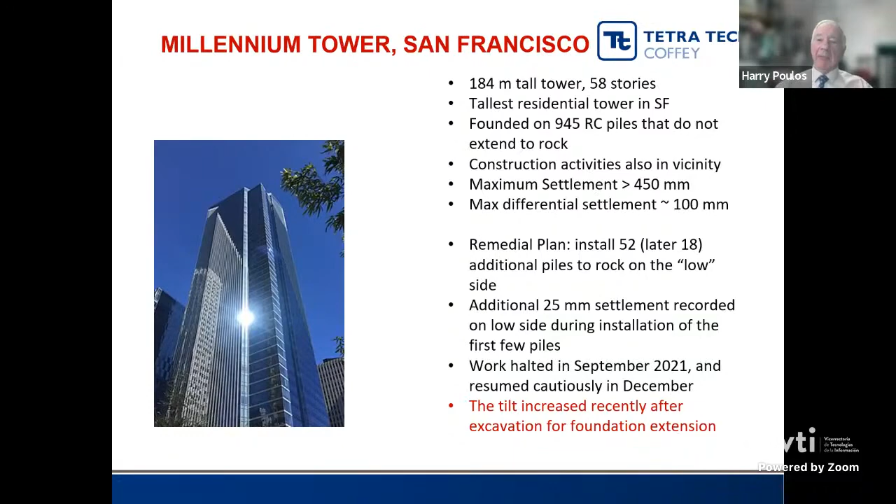So work was halted in September last year. It was resumed, I think cautiously, in December. But the tilt has continued to increase after the excavation for the foundation extension. At the moment I'm not quite sure where this building stands, but it's a very unfortunate situation, and I'm afraid that perhaps in hindsight some of these problems could have been avoided.

For example, the problems included the fact that the initial foundation design was non-optimal — it should have been recognized that for such a tall building, the underlying clay layers would be influential. There were nearby construction activities that caused ground disturbance. I don't think there was detailed monitoring of the settlements during construction, but there was after.

There was an inappropriate rectification scheme with attention devoted firstly to the low side before trying to correct the tilt. They perhaps should have started to correct the tilt on the high side that had settled less, before trying to correct the stiffness on the low side. That scheme caused even more tilt.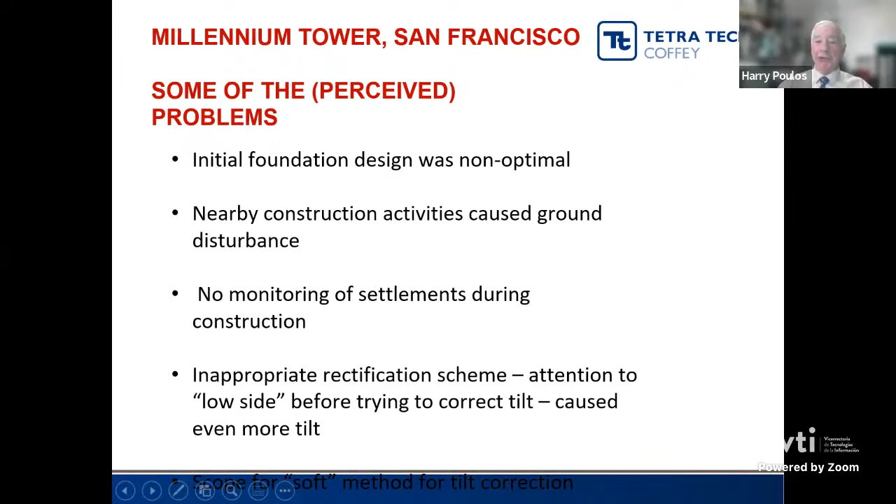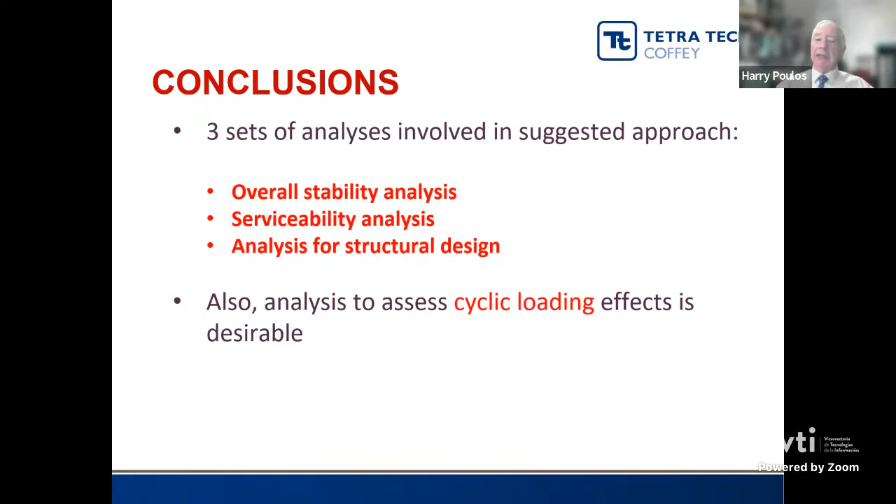In conclusion, there are three sets of analyses we generally do in the approach we adopt: an overall stability analysis, a serviceability analysis, and analysis for structural design. We also take account of cyclic loading effects to try to limit the loading on the piles so that we don't get cyclic degradation of skin friction. I think we are able these days to meet the challenges of tall building foundation design because we have modern methods used for in situ testing, laboratory testing, analysis and design methods, and load testing.

And in particular now with the Osterberg cell method being so widely used, we are able to get much better estimates of the performance of deep and very large capacity foundations. We, however, must always use simpler methods to check on advanced numerical analyses, because some of these methods in some ways are black boxes to the users. And if you don't understand fully what the limitations of analyses are, you may come up with answers that are not appropriate. So you must always have some means of checking the results.

We need to have cooperation between geotechnical and structural designers, and we need to be aware of the possible sources of problems in investigation, in design, and in construction. And finally, some of the precautionary measures that I've mentioned earlier should be taken into account to reduce the risks involved in the design and construction of high-rise building foundations. Thank you.